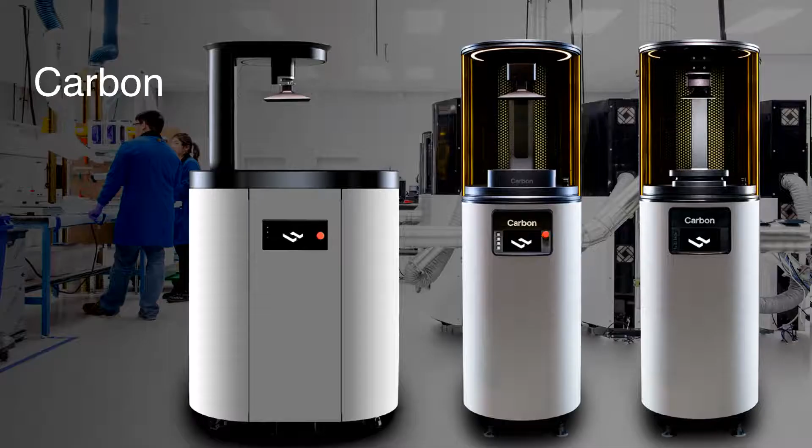A little bit of background on who we are. We sell 3D printers, based in Redwood City, California. We've got about 230 employees now, and we've raised $221 million in venture funding, so it's definitely been a fun ride.

But what got us into it was essentially three main problems that we saw in 3D printing. One was that 3D printed parts take forever. The printers are very slow, they're not economical, and it doesn't make sense. The other one was that 3D printed parts are mechanically weak.

This is not so much a problem for the metals, but on the plastic side, polymers derive all their strength from chain entanglements. They have memories of their prior form. So if you're laying down material layer by layer, you're going to have poor interfacial adhesion between those layers. Or if you're sintering particles together, you're going to have poor interfacial adhesion between those particles. That was a big problem with additive as well.

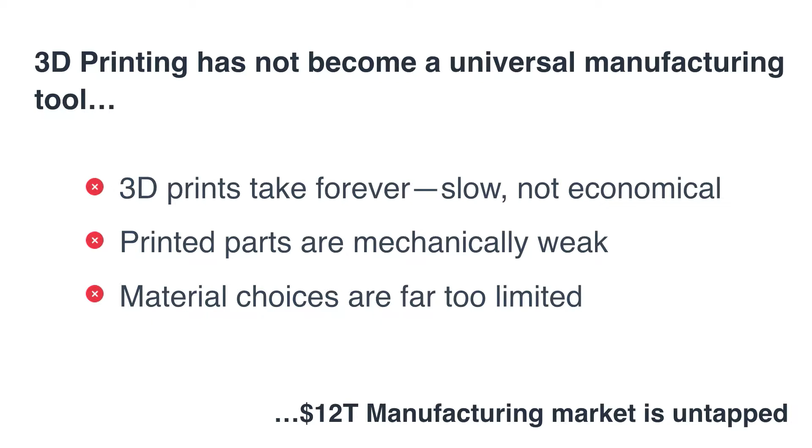The other one was that material choices are far too limited, and this is more of a cultural statement around the industry. The industry for a long time relied on large chemical companies to do R&D for them. That's not stuff the chemical companies do well—they're used to shipping things in tanker cars. Doing things in low-volume is not something they were interested in. So we thought we could attack those three main topics.

On the TED stage in 2015, we launched our process, which we call CLIP, Continuous Liquid Interface Production. It was a continuous process, no longer layer by layer. It's made up of three main components: a stage that the part actually adheres to, a projector similar to what you'd see here in the room today, and the window. The window is really the secret sauce behind the printing process.

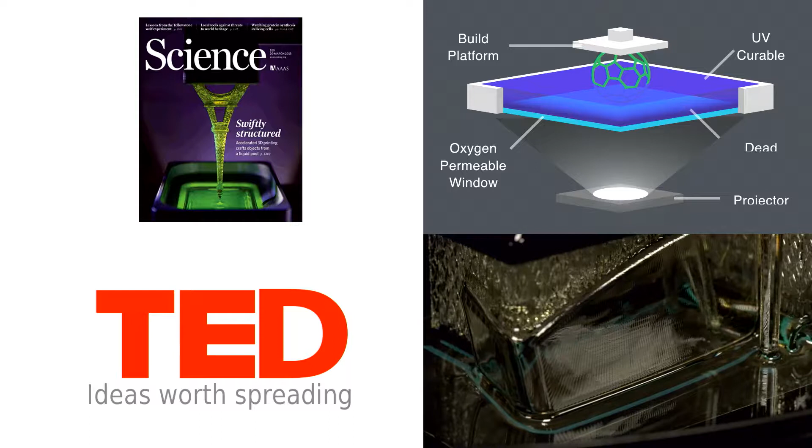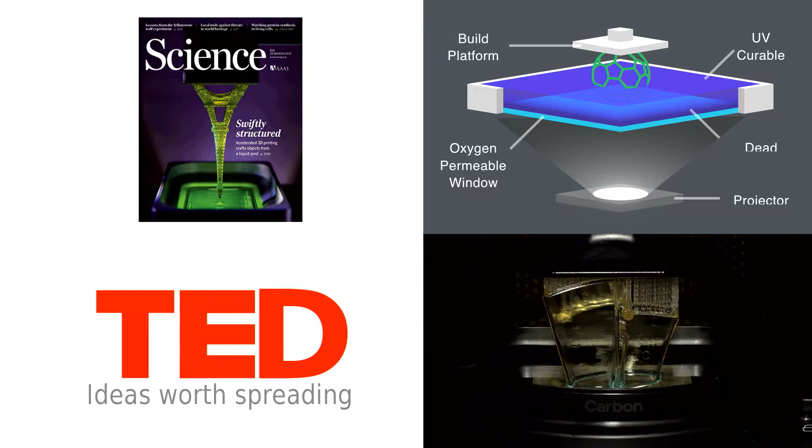That window is not only permeable to light, but it's also permeable to oxygen—think a contact lens, if you will. Oxygen inhibits polymerization from happening, where light causes it to react. So right at the surface of that window, right where the light is most intense, we maintain a constant liquid interface all the time that allows us to print in this continuous fashion.

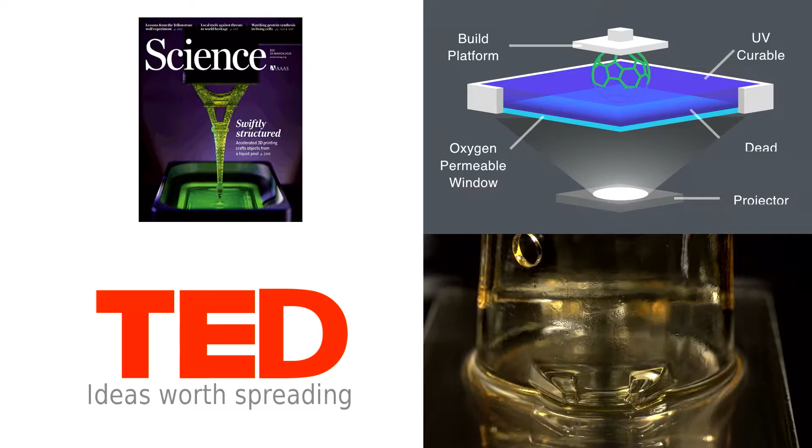What does this look like in real life? This is called an OCT measurement—imagine sonar with light, and you can see the dead zone right at the surface of that window. That dead zone is roughly 60 to 100 microns, depending on the material we're using. You can see the resin flowing through the gap, and this is what it actually looks like. This part is about 2 millimeters in diameter, printing at about 200 millimeters an hour. So that's a real-time image or video of what we do.

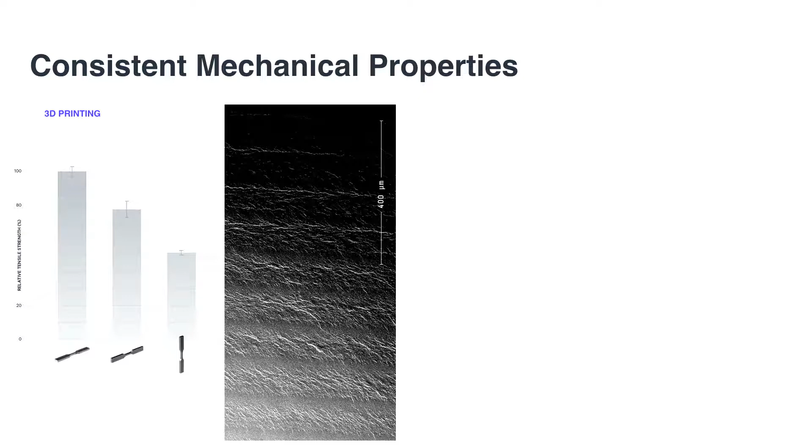Now there are several advantages beyond just going fast. It's very common in additive, if you look through the literature, to have variant mechanical properties. Depending upon the orientation of the build, you're going to get different mechanical properties in each of those directions. That's a major problem. If you're doing things like lattices, or things that need certain force requirements, you actually need to think about what orientation you're building in for the end-use application.

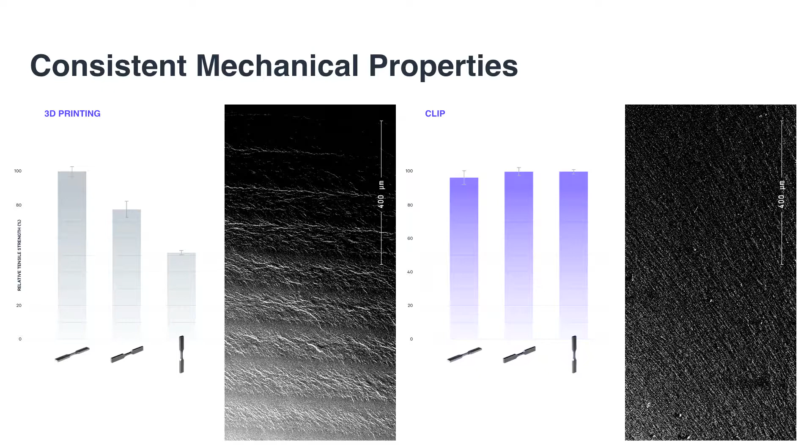Which is rough—if you're doing lattices, it's almost impossible, since you have all those struts going in different directions and each one breaks at a different point. Going continuously means we have invariant mechanical properties, so no matter what orientation you build in, you get the same mechanical properties in each direction, which is a big deal. That allows you to actually simulate how the part is going to perform before you make it, which isn't something many people can do in the plastic additive space.

One of the other things we pioneered was that it allowed us to get into a whole new world of chemistries. If you could just go faster but were using the same stereolithography resins everyone else was using, it wouldn't buy you much. You can prototype faster, but so what—that's not why we were here. Our goal was to figure out how to get thermoplastic properties out of a stereolithography machine.

And so we developed a process that we call programmable liquid resins. Essentially, we use light to lock shape, and we use a secondary chemistry through a thermal process to actually provide its mechanical properties and create those chain entanglements. And so you see vastly different mechanical properties

after print and post-bake. An example is the cyanate ester material. In the green state it comes off, it's about 250 to 280 megapascal modulus. After the bake, it gets up to about 3 to 4 gigapascal. So it's a very, very different material.

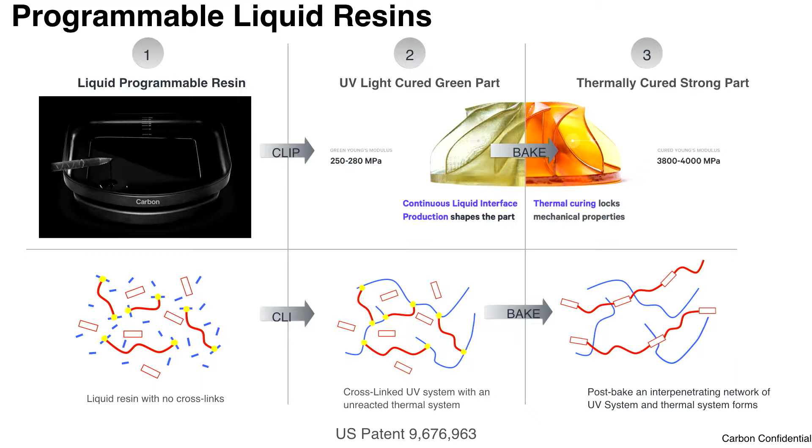And this has allowed us to get into a wide range of material properties, ranging from our rigid polyurethanes, which are more akin to PC-ABS, ABS. They have about 120% elongation at break, very, very tough material, to our flexible polyurethane materials that's more akin to polypropylene, over 200% elongation at break. You can do living hinges, snap fit features, those types of things.

Our elastomers are something that we're world renowned for. We do elastomers better than anyone. High temperature resistance and the cyanate ester for under the hood applications. We have an epoxy system that was really targeted to replace 20% glass-filled PBT in the electrical connector space. We have many electrical connector partners. That's something that we do very, very well.

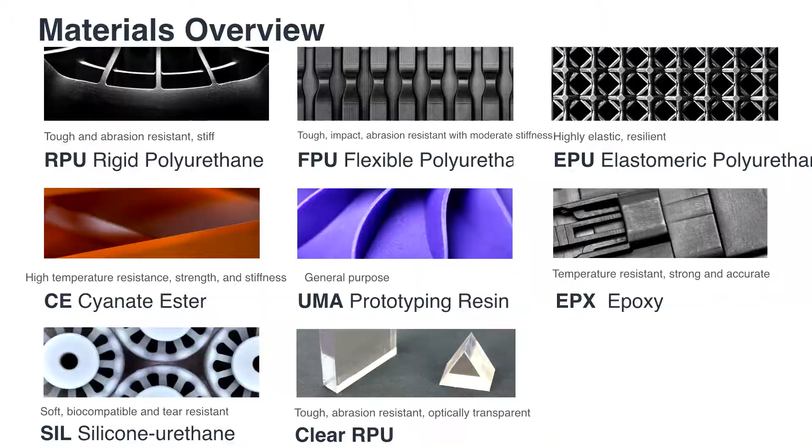We have a new material releasing actually this quarter, which is our new silicone material. This is a soft durometer elastomer, mainly angled towards consumer products as well as the healthcare space, and as a clear rigid polyurethane, the same toughness that you would expect from our polyurethane, but in something that is optically clear, which has a lot of applications both in dental and orthodontics as well as in automotive.

And what that really showed is that we were able to get a change of paradigm. When you were purchasing a 3D printer early on, you had a major choice to make in your purchasing process, which was if you wanted surface finish and resolution, you went to SLA and PolyJet. However, the material properties weren't very good. You put them out in the sun, they degrade. They were not very thermally stable. They would warp on your desk even under the incandescent lights.

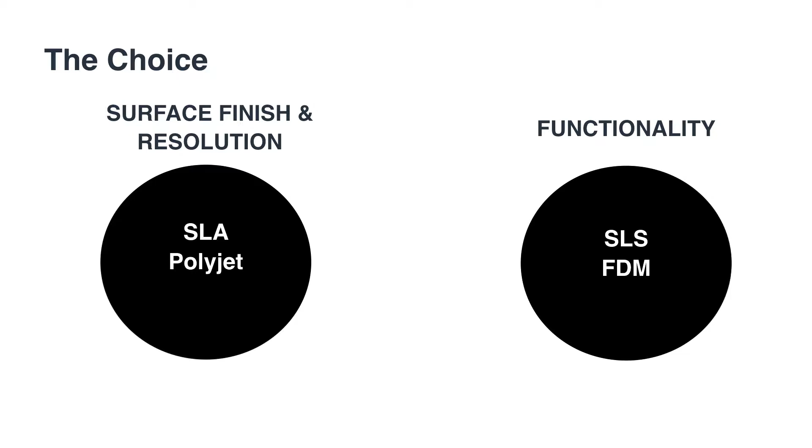If you wanted something functional, you went to SLS or FDM. The problem is the parts don't look very good. They have poor surface finish. They have porosity problems. You would never see an SLS or FDM component inside the cabin of a BMW. It just wouldn't happen. And so with Carbon, we were able to fundamentally change that.

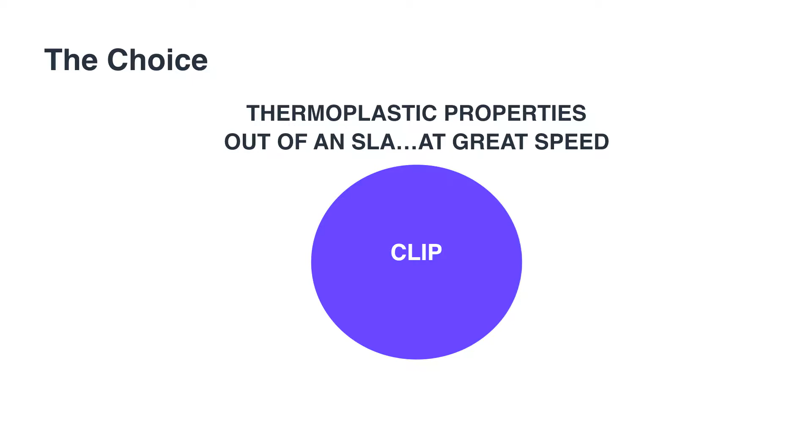We get the best of both worlds. We're getting those thermoplastic properties out of that SLA at great speed, which is a game changer and what has allowed us to actually get into production. By attacking those things, that is what has enabled us to make end-use components instead of focusing on the prototyping market that has historically been there.

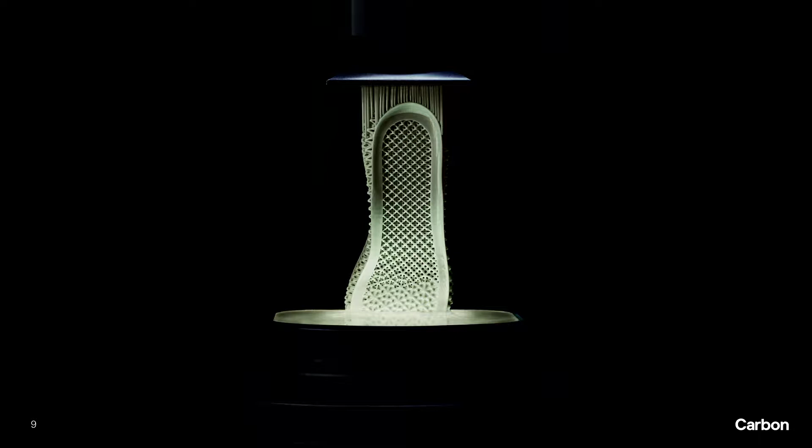And that's gotten the attention from many great partners, Adidas being one of them. Adidas partnered with us, and from the point when I had my first conversation with them to when they released their product was 12 months and 1 day. By the end of next year, they will be the largest user of 3D printers in the world by a long shot. And this is something that we're super excited to be on this roadmap with them.

The other big advantage is actually, and this was sort of found after the fact, is because it's open cell in nature, it's actually about 20 degrees cooler after 2 hours of wear. So the thermal properties are way better than what you would see from a normal sneaker.

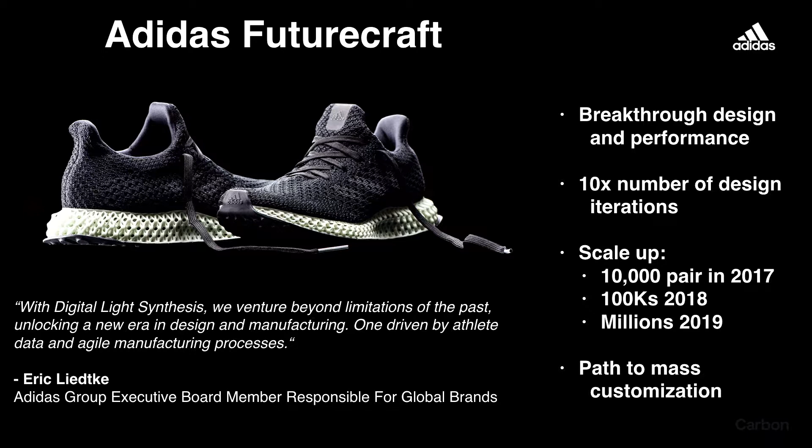So there's about 10,000 pair that will be released this holiday season. Next year will be hundreds of thousands, and then 2019 it's at millions, and our goal is to be around 50 million pair a year around 2020. So it is the largest manufacturing application by a long shot. When they're first released, they will be done in normal sizes. And then gets to the crux of this whole thing.

We've gotten to production. We now have the machine and the materials to get to end-use parts. There were a bunch of other missing links. And you start to think about it. Okay, you have the printer now, you can make the parts. What then holds you back from doing N of 1 pair for the world?

The problem is they have the scanning technology. Right now, they're making these designs by hand, one-off. It cannot be done by hand if you're going to make N of 1 for the world. So the design tools needed to take a major path forward, and were actually holding us back from making the value prop for Adidas even better. We've spent a lot of time working on our own internal design tools to help speed up Adidas's launch. However, they also have a lot of implications for outside of Adidas as well. We'll talk about that a little bit.

The other one was in manufacturing software systems. You have a facility of 50 to 100 of these in one space. You need to have the systems that are from a QC, quality perspective, from a tracking perspective, from an optimization of build perspective, built. Oftentimes you look to companies like Oracle and SAP to build those things for you. However, those are very, very large companies that are very, very slow. And so we unfortunately don't have the luxury of waiting for them.

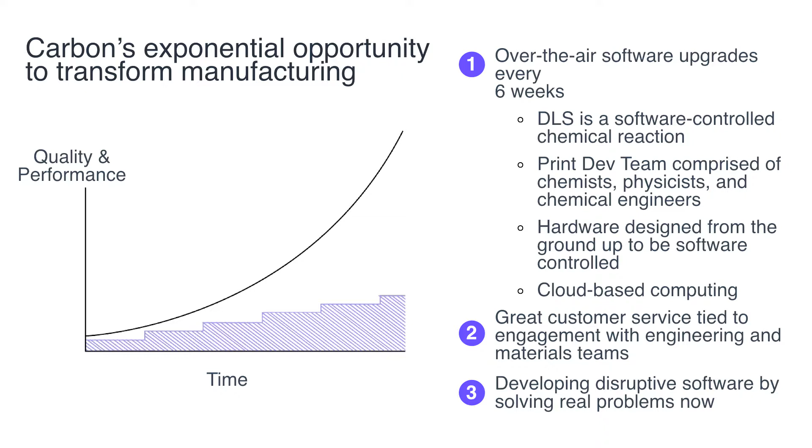This sort of leads into this printer being perfect for developing these manufacturing systems. I know every time that printer, every activity is done with that printer, whether you are filling it up with material, whether you're removing a build platform, whether you're removing a window. I have the ability to track it from the stage, the printed part, through the post-processing steps, all the way through, and we've been collecting this data. So this allows us to understand in complete deep detail the true cost per part.

Oftentimes people talk about the cost per part associated with the machine and the material. That is never just it. There is always post-processing costs associated with it. Being able to track that and monitor that, our customers want to know which shifts are better than other shifts and employee efficiencies. So this allows us to monitor all of those things.

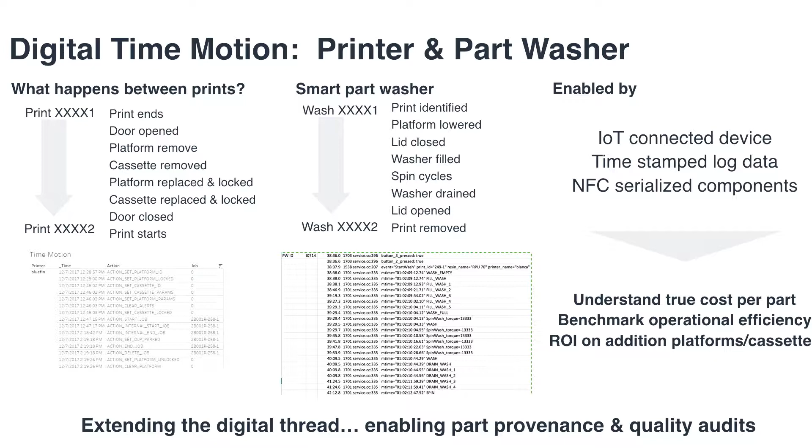It also allows us to track the part all the way through the process. So every pair of shoes that you see actually has a trace code on it. It ties back not only to the machine it was made on, but the lot of resin used to produce it, the window it was printed on, the stage used to produce it, and then the frame-by-frame manufacturing data. So when we go in and test its final performance randomly and see something wrong, we can go back and look at what happened, tie it back, and prevent that from happening in the future, which is something that's very, very powerful.

The other thing, as you can imagine, is setting it up for a shop floor.

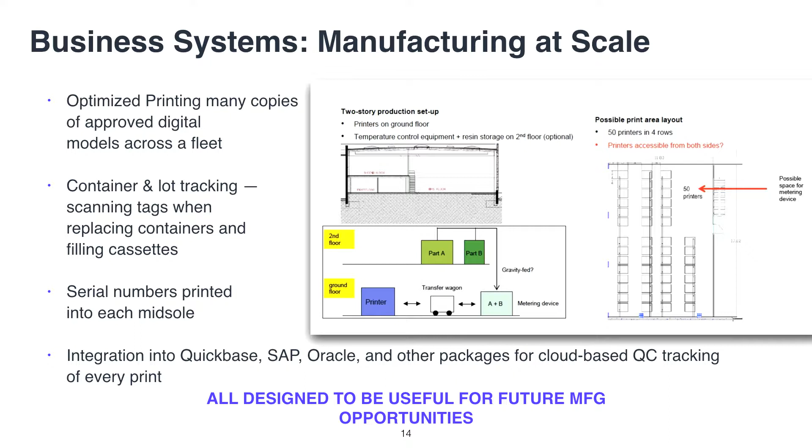So optimizing the machines, being able to automatically push jobs, avoid machines being down - those are the types of things that need to happen if you're producing 1 million pairs of shoes a year at a 50 printer facility. That's something we have the ability for, that we're building out for the first time as well. We're building it with the mindset of eventually having to integrate with something like SAP, QuickBase or Oracle.

Lattice design was another piece. If you're using technologies to print a block, there are better, much cheaper ways to make blocks. For our technology, the more complex it is, the better it's going to be. However, the design tools haven't really caught up. The main reason is there's never really been a technology that could produce something people actually wanted, so software companies weren't putting tons of effort into this space. Now that we have that technology, the opportunities are starting to come up, and we're really starting a new phase in Carbon's world.

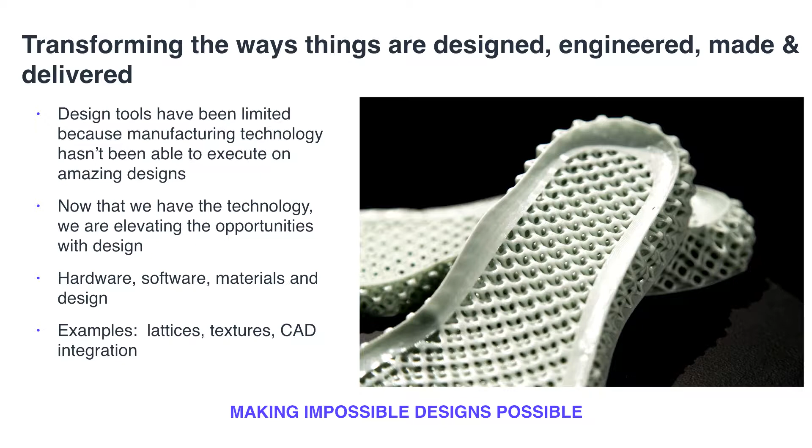When we first started, we were based on 3 pillars: hardware, software, and materials. And when I said software, it was mainly around machine functionality - that connectedness I spoke to earlier. But we're starting to realize a 4th pillar that's really, really important, which is around design. That's something we're spending more and more time with today.

Oftentimes our customers come to us wanting to be the Adidas of blank industry - fill in the industry here. The problem is they don't know how to do it. So we spend a lot of time at Carbon holding our customers' hands through that process, almost acting as their Sherpas as they go up Everest. That's something I think is unique to us, and one of the things we developed out of that was a really, really powerful design tool.

Historically, the conventional way to think about lattices is that they're repeating 3D unit cells, and they go over and over and over again. The problem you traditionally see, though, is these non-conformal problems that show up, where the parts actually have pointed edges and so on.

And so when you're putting in a compression profile as your output, these areas create problems - they create collapsing, premature collapsing. They're not actually true to matching the compression profile. The other problem is they create manufacturability issues - the printer sees that, and it often requires you to put a support or orient it a certain way to avoid that. The other problem is that aesthetically it's not pleasing - you don't want variation to that extreme. Oftentimes these parts are wrapped in other things, and if you have points like that, it's not going to wrap well.

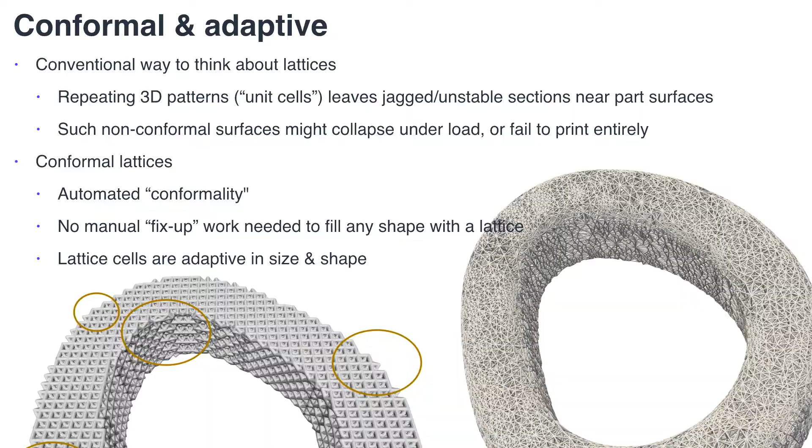So we developed a conformal lattice technology that's automated, cloud-based, and happens very, very quickly. Somebody asked earlier how we handle large size files - our whole system is cloud-based, so you can put a CAD file up in the space, put in your compression profile, and it will create a lattice geometry conformally to that shape and send it to be printed.

But creating the file is not the end game - that's just one thing. Somebody mentioned earlier about complexity being free with additive, and I love that connotation, but it's not fully true. 3D printers all have design rules just like anything else - minimum wall thicknesses, minimum strut thicknesses - and it's dependent on the process and the material you're using. Those are the types of things that come into play.

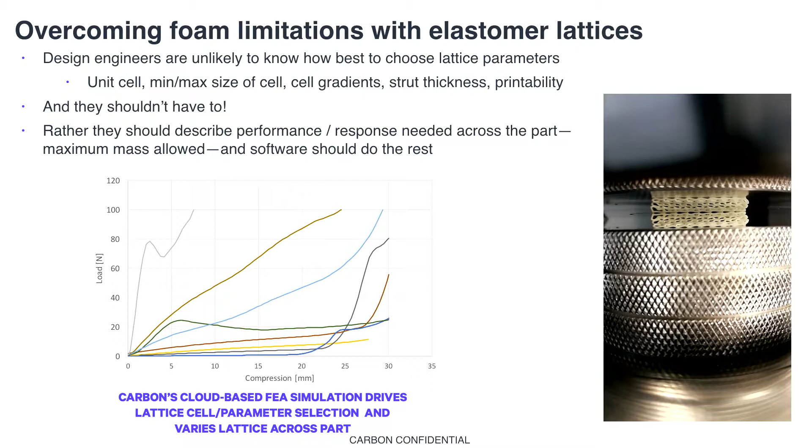So what we're trying to do is make it so designers don't actually have to think about any of those things - they can just put it in. We have a library of different cellular structures and compression profiles that we can match specifically to you. And not only that, but it actually simulates the parts in the cloud before they're printed to make sure it behaves exactly how you want. Then on top of that, it goes through a printability FEA to make sure it's printable.

And if the printability tool comes back and says there are some issues from a printability standpoint, it will automatically adjust the file accordingly, making sure that you're okay with it as a user.

And this has become super powerful for Adidas. Adidas was our first customer actually using this. What this is allowing them to do is, instead of releasing just one product within a year, you'll see them release 4, 5, 6 products in a very short period of time. That is a major, major deal.

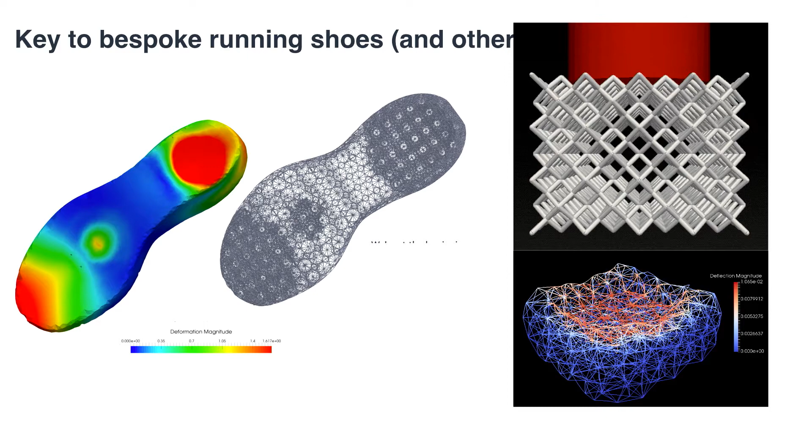Now that you have the tool to make the parts, you need the design tools to produce the parts for that tool. And we're doing a big push in that direction.

The other thing that comes up is around textures. People don't like the aesthetic look of parts that are naturally 3D printed. When you're producing an injection molded part, you create your CAD file, go through your Mold-Tech book of textures, select what you want, the tools are laser etched, and you get your texture.

Additive is a powerful chisel. We can do many different types of textures. And texture is a very important piece in the design world nowadays. It gives you the aesthetic of value or luxury. It's used in many ways to help change your viewpoint of mechanical properties.

We've had a lot of customers interested in doing this, and if you're familiar with the texturing tools out there that do it in CAD, one of the major problems is that it does well on flat surfaces, but when you try curved surfaces, it starts to fall apart. It fades in and out.

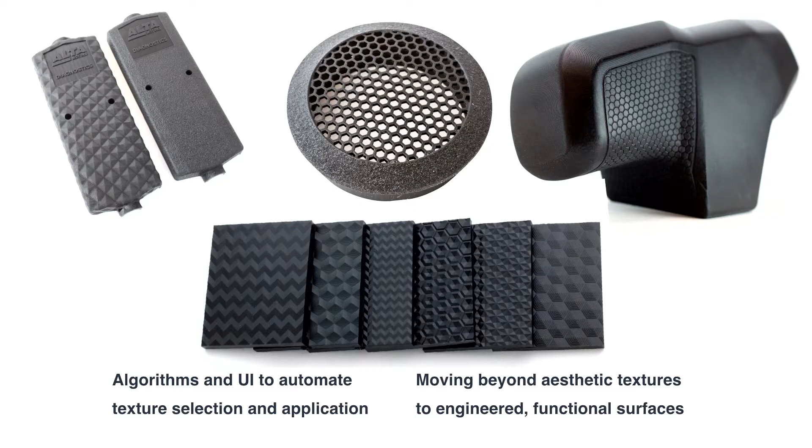So we've created a really powerful cloud-based algorithm that allows you to select areas and apply 80 different textures to them. You can be very specific in the file, and this completely hides the defects, what would be viewed as defects of 3D printing.

Not only that, but within one part, I can highlight where I want a texture, where I want a different texture, and so on, and do custom textures for customers. As you can imagine, Caterpillar, John Deere, Audi, those companies have their own textures, and we can digitize it for them so that only their printers have those textures.

What's really interesting is that now we're able to get to a point where textures aren't just for aesthetics, but they're also functional. If you could use textures to affect aerodynamics, or for friction control, those are the types of things that become really interesting.

Imagine a lattice bike seat with a texture that prevented you from slipping back as you were riding down the road. Or textures on a helmet shaped like shark skin that helped with aerodynamics. Those are the types of things we have the power of doing and are exploring now with these tools.

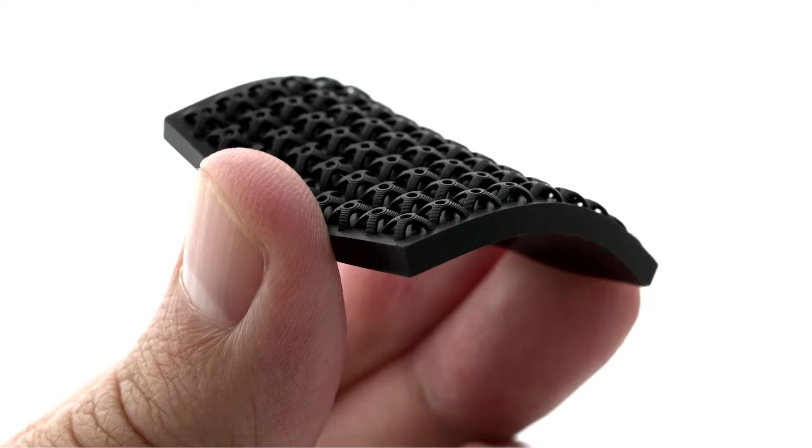Also, textures don't just have to be two-dimensional. Textures can be three-dimensional as well.

This is something we did for one of the local bike companies for a bike grip, and it's three-dimensional. Each one of those is actually an elastomer piece, and they sort of collapse on their own, giving you a soft touch feel. The other advantage is air is getting in there, massively helping thermals.

Heat is a big problem for handlebars, so being able to avoid that is really important. The tool to do this is very complicated. Being able to assess a three-dimensional texture across a surface through curves and undulations is something not many people can do, and something we're pretty excited about. It opens up a whole new world of possibilities.

Microneedles are something that's really interesting to us. These are small structures, 200 microns at the base, 1-to-1 spacing, 2,000 microns tall, 1.25 micron tips, made of biodegradable systems for drug delivery and so on. So those are the types of things you can now do with these packages.

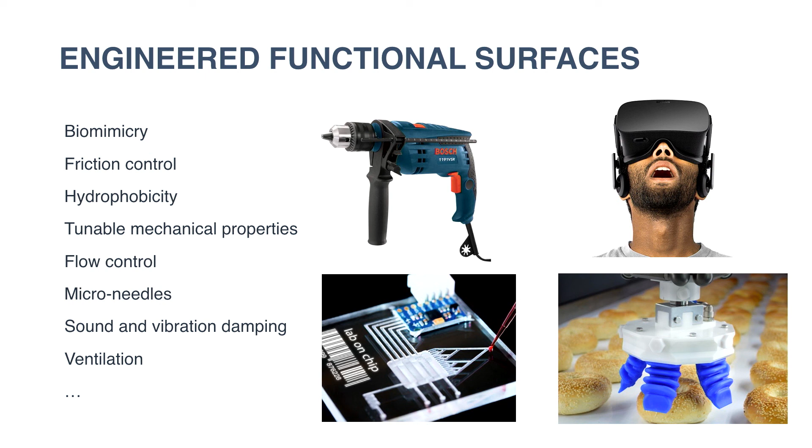Sound and vibration damping is a huge one. A lot of people are interested in things like that, and ventilation, as I mentioned before.